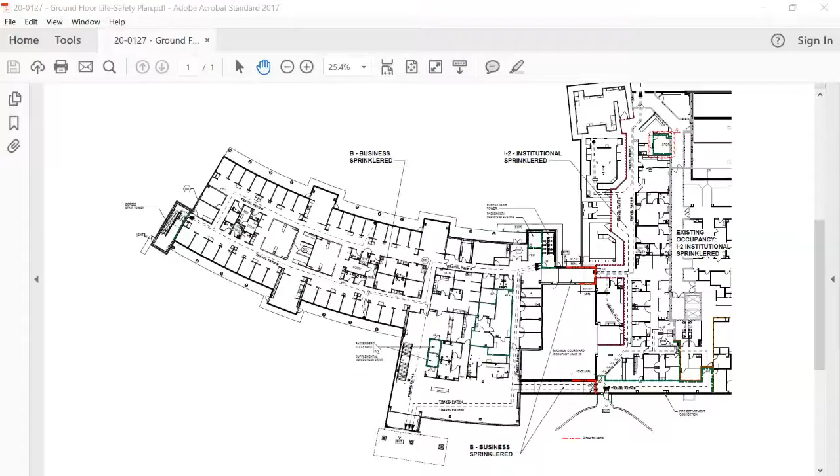Is it possible that I can control the screen? I do have the documents available that we could walk through and look at, if that's helpful. Paul, you're muted. Paul, you're still muted, I'm sorry. If you could share your screen, I can put it up there. Okay, let's see, let's see if I can do this here.

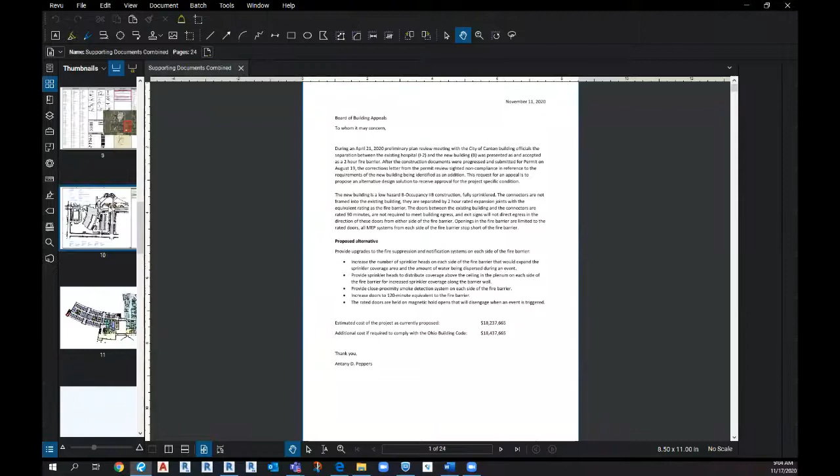Sorry, bear with me one second, I had it open and it's closed. There we go, okay, thank you. So thank you, appreciate it, your time.

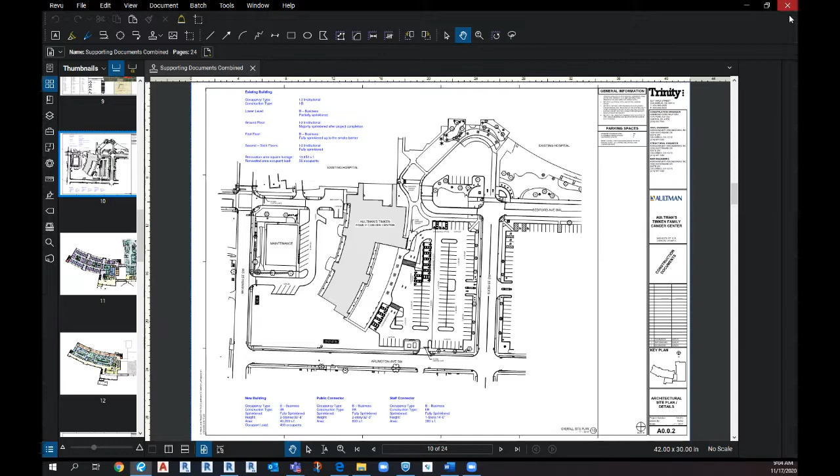So what we're looking at in this view is the ground floor master plan of the hospital. What's outlined in red is the existing building, and what's outlined in blue is our new addition.

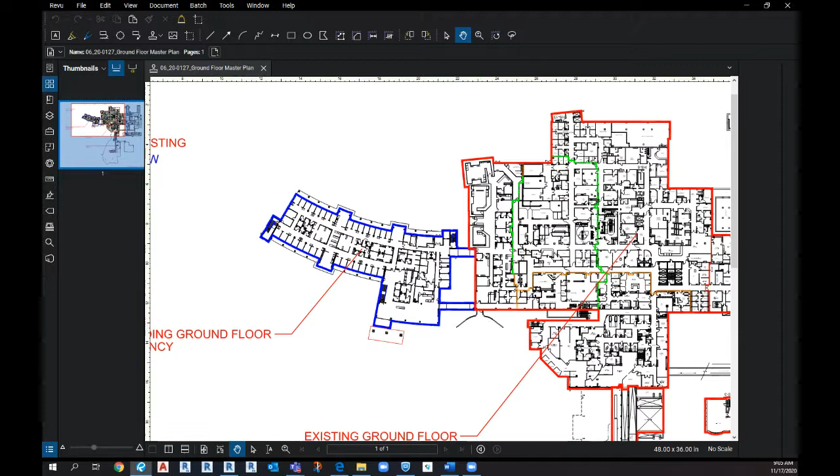Well, first off, can everyone see my screen? Yes. Okay, well, I can.

What's shown here is a staff connector and a public connector, and this basically shows the limited amount of area in which this new building is coming in contact with the existing building. The connectors aren't framed into the existing building. They're separated by 2-hour rated expansion joints that would have the same equivalent rating as the fire barrier. As I said, they serve the purpose of providing access to extended care beyond the destination services within each building, and the volume of traffic would be minimal, limited to those looking for additional care outside of this building that they would be seeking in the existing building.

So, let's see. The initial plan review for these drawings was issued on February 20th, and we had a response that came back suggesting that the fire barrier may not be sufficient. And like everyone else, COVID hit and we weren't able to get a meeting scheduled with the city until the 21st of April. After we presented that fire barrier to the city officials, we left with an understanding that it was sufficient. And then we didn't submit our drawings until the 19th of August.

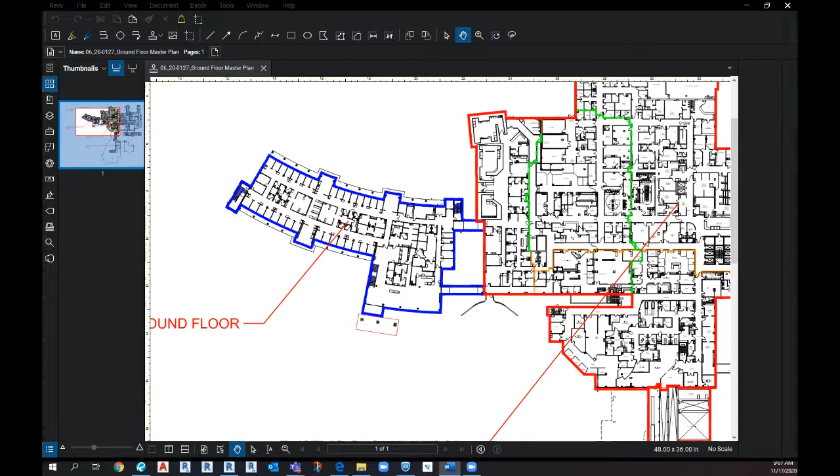We've been sharing and speaking with the building official in regards to this issue, and we have proposed some upgrades to the fire suppression and notification systems on each side of the fire barrier in both the existing building and the new building. Instead of using general sprinkler coverage and general fire suppression systems, we would propose a more pointed and directly applied additional protection to the fire barrier. I know I sent supporting documents that basically showed it in plan, and here on the screen what you're seeing is a representation of what we're anticipating in order to provide these upgrades to the fire suppression systems, to provide a more pointed and more engaging suppression that protects the fire barrier between the two buildings.

So this would include a sprinkler head distribution increase. This would include a smoke detection system directly adjacent to either side of the fire barrier. This would include side sprinklers in the pockets to cover the area outside of the general ceiling. It would also include turning the sprinkler heads up and providing sprinklers in the plenum above the ceiling, just to maximize the coverage for any water distribution from the sprinklers along that barrier wall.

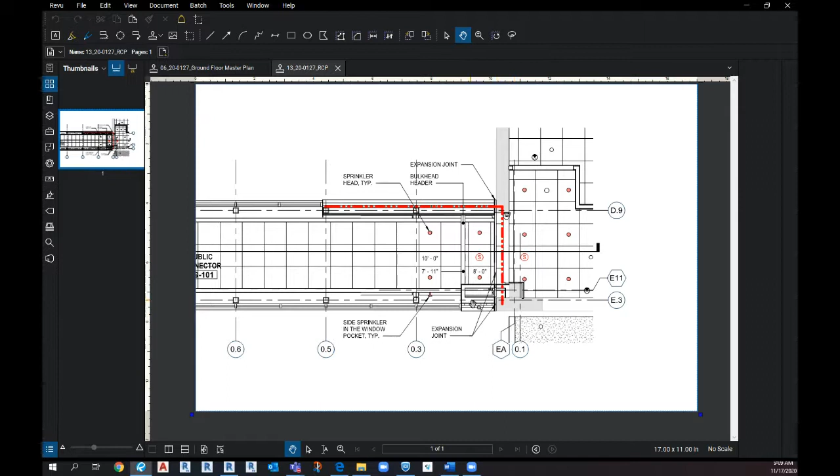We'd also be increasing the doors. I think they're required at 90 minutes. We would be increasing the door rating to 120 minutes, and the doors would be on magnetic hold opens. One thing to point out is these locations where we're engaging the building with the connectors, they're not exits. They're basically just general circulation, so we wouldn't have any signs pointing towards these doors for exiting.

They're not considered exits. Can I ask, while you're on that question, the life safety plans do show egress paths through those doors. Why is that? It's showing egress paths away from the doors, so it's not showing egress passing through the doors.

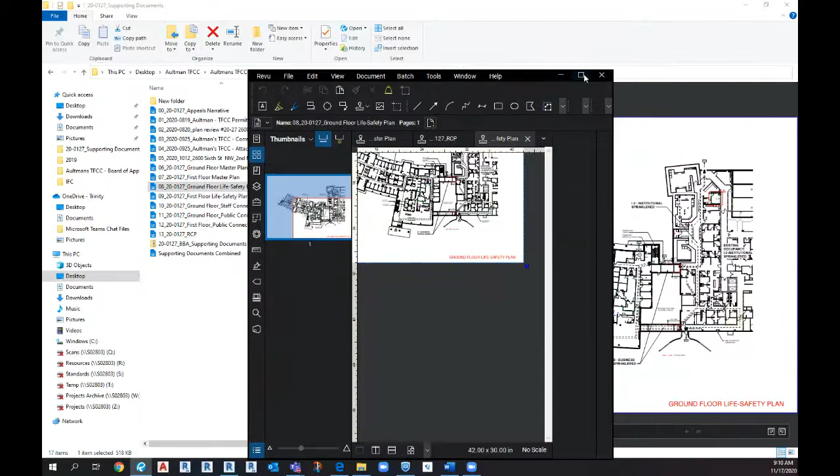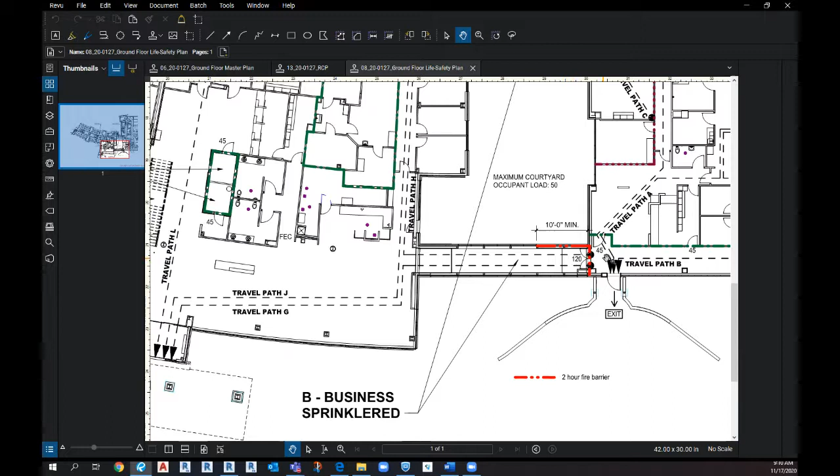Can you pull up your life safety plan and explain to me what those lines are then, that show the direction of egress travel? Yes. So the lines represent, if you're standing at these doors, you're moving in this direction. So it's basically determining the travel distance of exit from those doors to the actual exit. So this is not an egress path going from this connector into the existing building. How about the second floor?

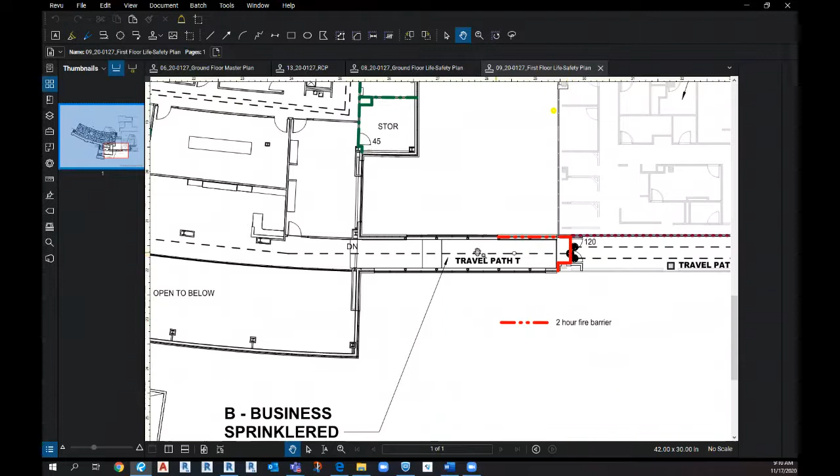So the second floor is showing an egress path going from the door in this direction, and it's showing egress paths for the existing building starting at that point and going in this direction. So at no point are we showing egress continuance through those doors.

Okay. Mr. Peppers, I'm not trying to cut you off, but there were a couple questions there, so you can proceed.

Just the final point I'd like to make, we have been communicating with the city officials and have presented these options to Mr. Dodovich.

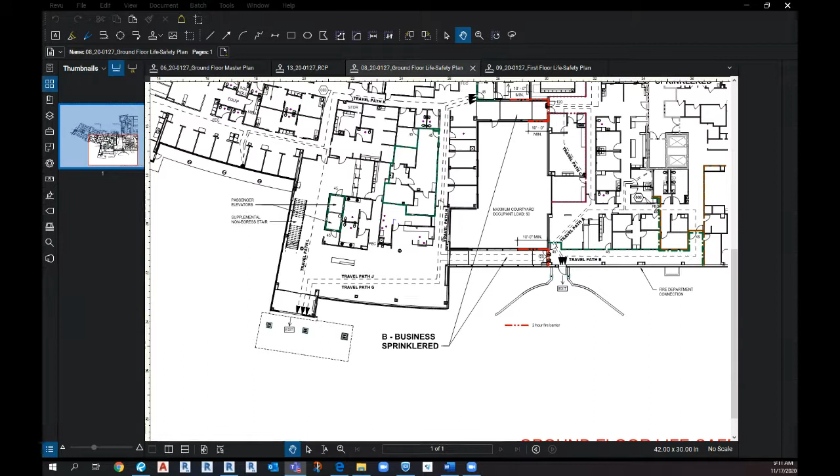Okay, any further questions of Mr. Peppers at this time? Yes, Mr. Chair, I do have, I guess I need to have an understanding why you can't make it a firewall. Why you're insistent and want to go through all these efforts to make it a fire barrier. What advantage does that give you?

What's the hardship? Why can't you do a firewall as required? Well, the primary hardship here, constructability wise, is there's an elevation difference between the existing building and the new building of 3 feet 11 inches, and we have an accessible route moving through the connector. Right now we're at the limit where that ramp stops at the existing building and stops just inside of the new building. If we end up having a firewall, we would probably need to flatten that out in order to get a 5-foot flat surface on either side of the firewall, probably increasing the length of that ramp by roughly 10 feet.

And that would bring our ramp 10 feet into the building and would require us to do a lot of both restructuring of the connector and connections of the connector in the new building, as well as trying to find routes for MEP services now, because we've created a pinch point and can't get any ductwork through into the connector below.

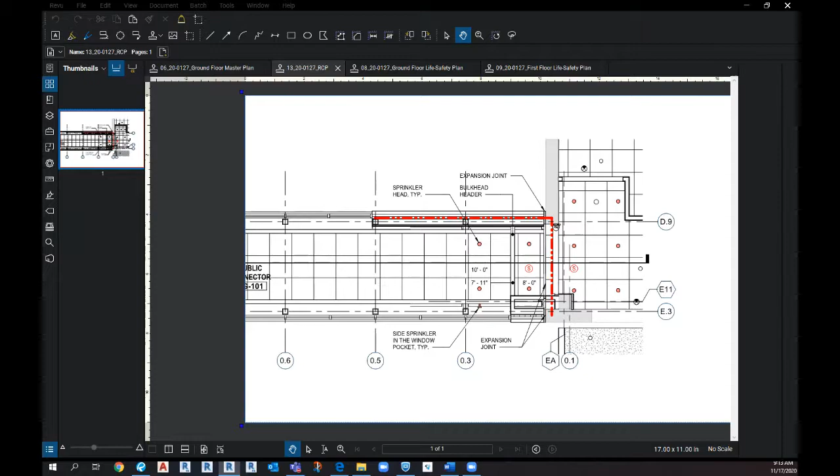So, understood. Okay, any other questions of Mr. Peppers at this time? Okay, Mr. Dodovich. Now, I would like Mr. Peppers to be able to show us a section, Mr. Chair, that explains in more detail what he's talking about.

Okay, so this is our new building here. That's the exterior wall of the new building. This is the exterior wall of the existing building. And there's 3 feet 11 difference between the finished floor in the existing building and the finished floor in the new building. So we have an accessible ramp here that has to flatten out and continue down to the existing building. If we end up putting a firewall in the connector, that's going to add an additional 10 feet to flatten out on either side of the firewall to maintain the accessible route. So that's going to take our ramp and pull it further into the building.

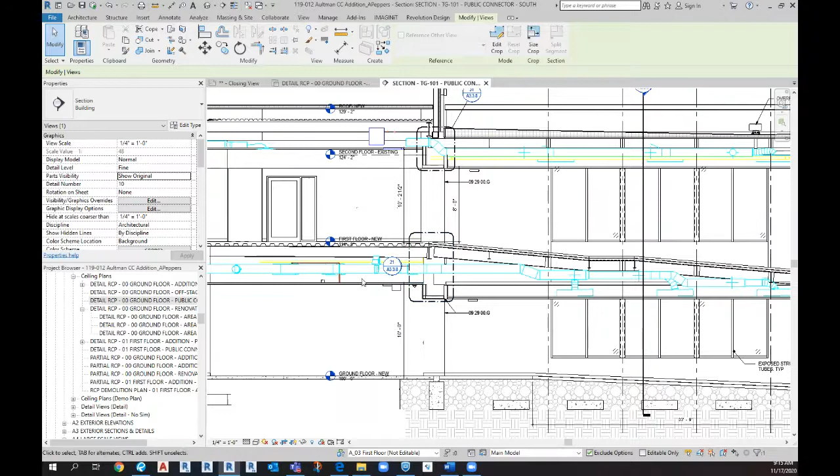And we're going to have a pinch point here where we're trying to bring in ductwork, trying to bring in our MEP services into the connector to service the floor below. So I think it brings our ramp almost back to this point. Yeah, it brings our ramp significantly into the building.

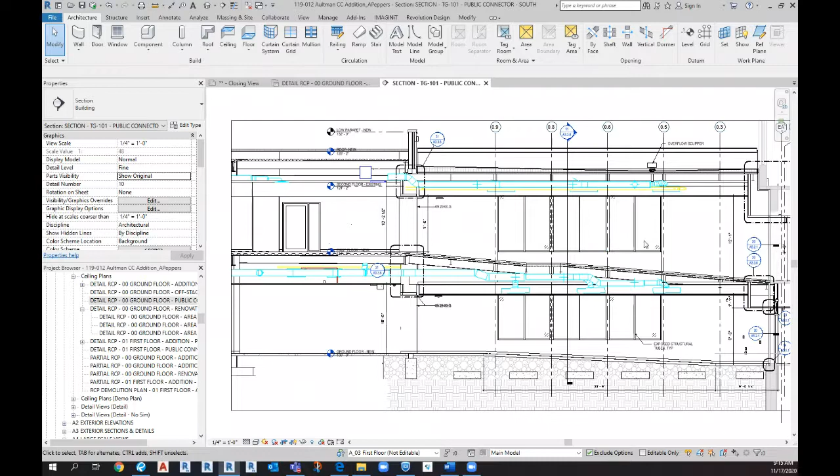So what stage of construction is this facility in? Because to me, it looks like some better planning about how this works would have made it that you could do what you needed to do. So on paper, yeah, that makes sense: move the building a little bit or adjust your height differences between floors and you're done. So I need to know why now. If this thing's already done and constructed and you're stuck, that's one thing. If it's, oh, we got to do some redesign, that's a different thing.

So, yeah, technically construction has not started on the project at this time. We were anticipating that instead of making those changes to the drawings, it's possible that we would be granted a variance in order to provide protection that's equivalent to or acceptable for a fire barrier as opposed to putting in the firewall.

Mr. Peppers, this is Chip Welch. I have a question. Why is the addition designed at a different height than the existing building? Why were they not on the same grade?

Let me let Vince Lance answer that question. When I came into the project, these were established. Part of that, the addition is at a higher grade because of flooding that does happen in this area, drainage that's outside of the hospital's control. In that basement area, that has been a constant concern, as well as the existing building has different floor-to-floor heights. It's an older building. This cancer center requires more interstitial space in a modern building. So that is initially what set that ground floor in the hospital at a different grade than everything else, where we would be connecting to.

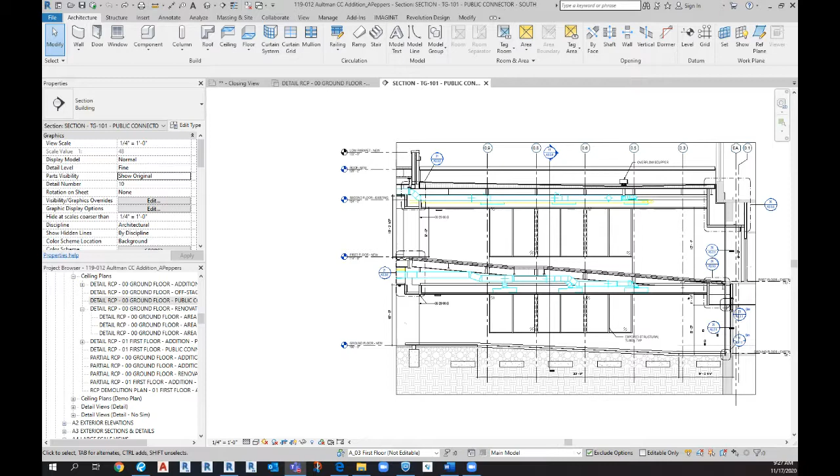So it will take a few minutes to put them all together. Okay, so Mr. Peppers, Mr. Dodovich, we're going to go off the record, let our architect member try to work on crafting something, and then we'll reconvene. We'll vet those with both of you and see where we go. Is anything further right at this time, or can we go on recess? All right, we're going to go on. Nick, we're off the record. Thank you, Mr. Chairman.

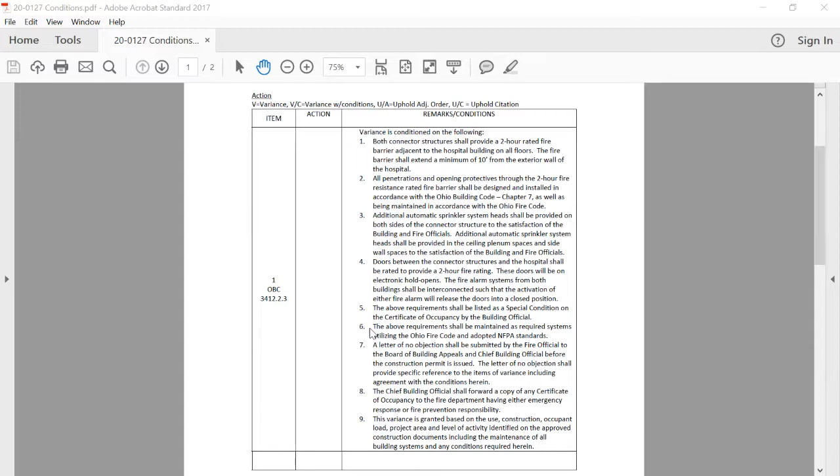Number 2, all penetrations and opening protectives through the 2-hour fire resistance rated fire barrier shall be designed and installed in accordance with the Ohio Building Code Chapter 7, as well as being maintained in accordance with the Ohio Fire Code. Number 3, additional automatic sprinkler system heads shall be provided on both sides of the connector structure to the satisfaction of the building and fire officials.

Additional automatic sprinkler system heads shall be provided in the ceiling plenum spaces and side wall spaces to the satisfaction of the building and fire officials.

Number 4, doors between the connector structures and the hospital shall be rated to provide a 2-hour fire rating. These doors will be on electronic hold opens. The fire alarm system from both buildings shall be interconnected such that the activation of either fire alarm will release the doors into a closed position.

Number 5, the above requirements shall be listed as a special condition on the certificate of occupancy by the building official. Number 6, the above requirements shall be maintained as required systems utilizing the Ohio Fire Code and adopted NFPA standards. Number 7, a letter of no objection shall be submitted by the fire official to the Board of Building Appeals and the chief building official before the construction permit is issued.

The letter of no objection shall provide specific reference to the items of the variance, including agreement with the conditions herein. Number 8, the chief building official shall forward a copy of any certificate of occupancy to the fire department having either emergency response or fire prevention responsibility. And number 9, this variance is granted based on the use, construction, occupant load, project area, and level of activity identified on the approved construction documents, including the maintenance of all building systems and any conditions required herein.

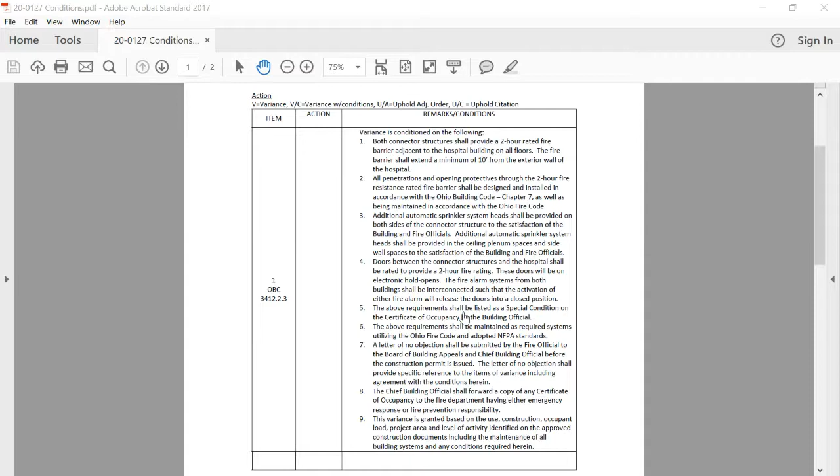Yes, Mr. Chair, for Board of Building Appeals case number 20-0127, the appellant is Aultman Hospital for the premises Aultman's Timken Family Cancer Center at 2600 6th Street Southwest, Canton, Ohio 44710. The appellee is John Dodovich, building official for the City of Canton Building Department, and adjudication order number 2020-027-3. I move to grant the variance subject to the conditions previously read in the record and noting the no objection of the building official.

Okay, that motion's been made. Is there a second? Second, Mr. Chair, Chip Welch. All those in favor signify by saying aye. Aye. Aye. Any opposed? Okay, the variance is granted with those 9 conditions on a unanimous basis.

Mr. Peppers, anything further to come before the board? No, I thank you very much for your time this morning. Thank you. And Mr. Dodovich, anything further to come before the board? Thank you, Mr. Chair. No, thank you. Nothing else. Okay. Thank you. Thank you, man. Okay. That case, thank you.

That case is adjourned. So we can consider our 9 o'clock Germantown case right now, or does anybody on the board need a break?

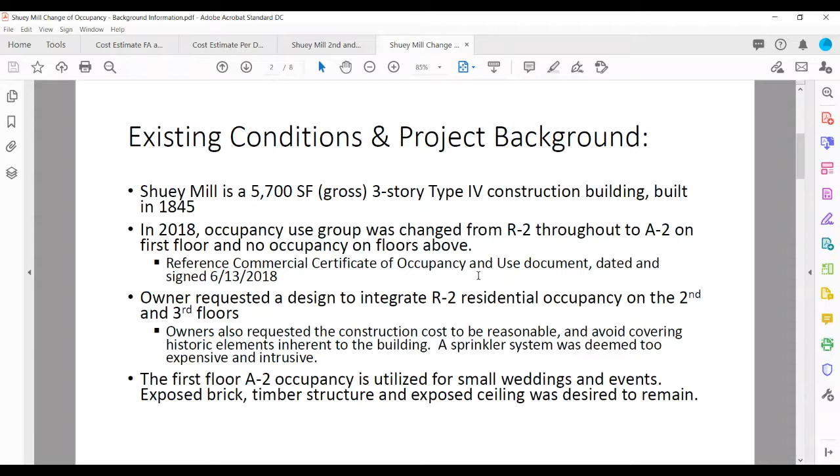That's where OBC Chapter 34 came into play. Just to give a little background, since this is an old historic mill, they didn't want to change a whole lot of the look of the structure, and also didn't want to break the bank. So the design features for this project included Chapter 34 compliance alternatives to achieve safe and efficient design, including separation of occupancy, smoke alarms throughout, and a second means of egress by the stair—all to overcome the requirement to sprinkler the building.

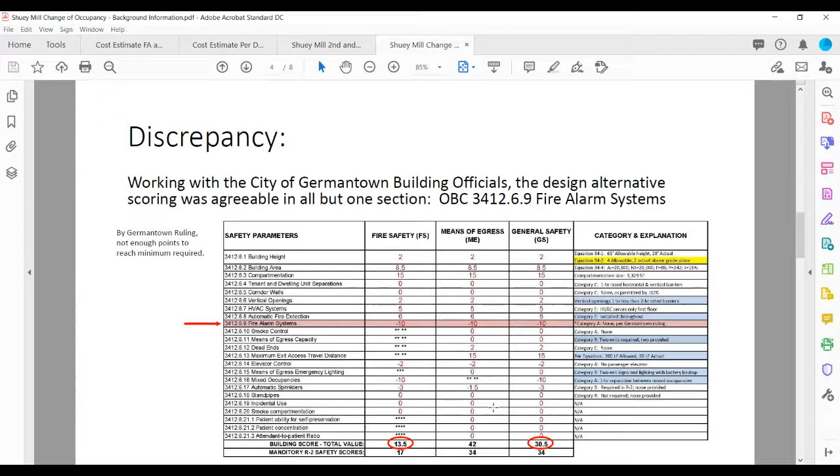The discrepancy came while working with the Germantown building officials on section 3412.6.9, the fire alarm systems. Their ruling was that there was none, and I disagreed—I'll show you in a minute. But meeting the mandatory R2 safety scores is virtually impossible with that ruling, because it gave a -10 for none. So we're not going to be able to meet it, even though the building would have been in full compliance with 907, the fire alarm system and smoke alarm—it would still receive a -10.

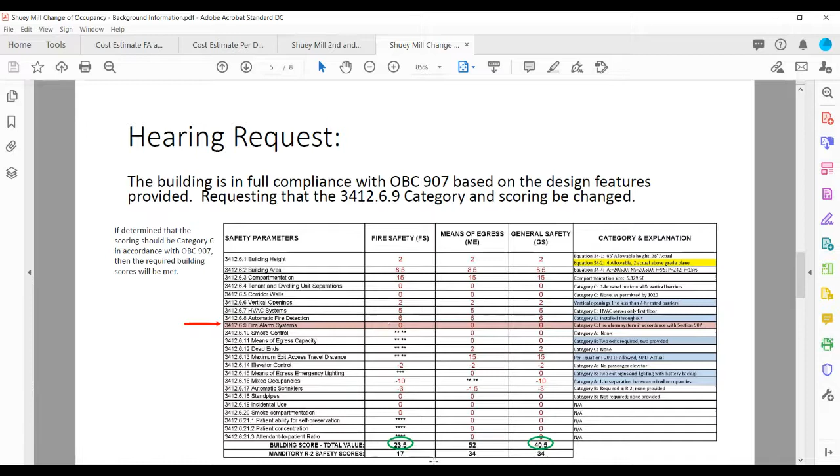So with that, what I believe would be the correct ruling, and what we are appealing, it meets and exceeds fairly well. The background on the code, per 907, the fire alarm, we go to the R2 occupancy for manual fire alarm system. We do not meet any of these requirements for dwelling units, and where we do install smoke alarms, the alarming systems are applicable for smoke alarms in R2 occupancy. All of these are included as required and interconnected in the dwelling units. So we are in full compliance with OBC 907 fire alarm detection systems.

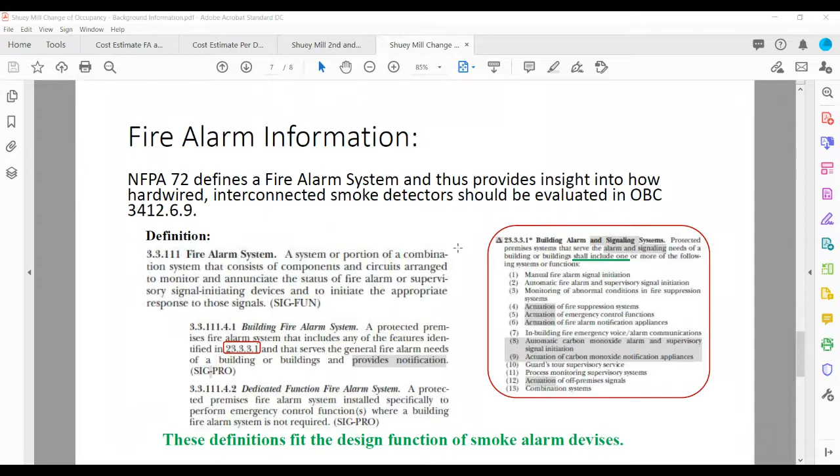So NFPA 72 defines the fire alarm system as a system or portion of combination systems, components, circuits arranged to monitor and annunciate the status of fire alarm. All of these definitions that NFPA 72 gives, in addition, they have a section for detecting devices, which are all part of the fire alarm system. So I believe it'd be unfair to consider the smoke alarms to not be part of the fire alarm system. NFPA 72 defines it, and further in OBC 907, the smoke alarms are part of the fire alarm section. So for that reason, I believe that we are in compliance, and that we do have, by the definition, a fire alarm system, even though it is not addressable. That's not part of the definition. So that's why we are requesting a review and appealing the score, such that since we are in full compliance with this design of having smoke alarms interconnected and hardwired with battery backup, that we have done enough to satisfy a fire alarm system on the R2 occupancy of the second and third floor. Over.

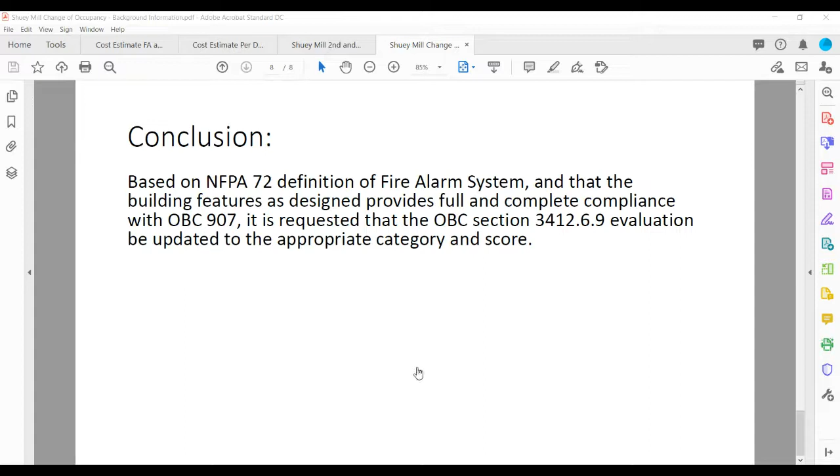Okay, any further questions of Mr. Elliott by members of the board? There have been some already. Yeah, I have a question for him. Exactly explain to me what's the difference between what the code requires for a fire alarm system and smoke alarms?

Well, NFPA 72, per their definition, it doesn't seem like there's much of a difference. It's the fire alarm system in NFPA 72, section 3.3.111: a system or portion of combination systems that consist of components and circuits arranged to monitor and annunciate the status of a fire alarm or supervisory signal initiating devices, and to initiate the appropriate response to those signals. I think that a fire alarm, a smoke alarm or heat detector, those alarms do satisfy that requirement.

How does a fire alarm system, other than the smoke detector and heat detector, differ? So there are no fire alarm systems other than smoke detectors and heat detectors?

Oh, no, not at all. They're in the definition given in NFPA 72, which lists other items of what could constitute a fire alarm system.